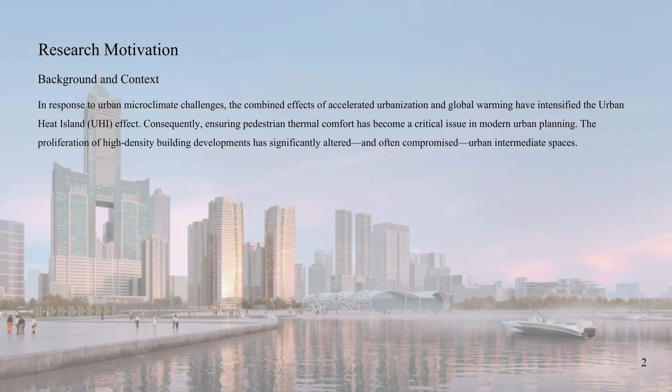To address these challenges, this study investigates the application of urban elevated corridors as a vital intermediary system for future open space in Kaohsiung.

There are three core values: ecological linkage, functioning as an extension of urban green infrastructure. It forms vertical ecological transition nodes and elevated thermal streets at ground level.

Pedestrian integration: by integrating ground level pedestrian circulation with elevated walkway networks, it creates a more efficient and safer walking system. Social catalyst: it also acts as a social medium that enhances urban connectivity, promotes public interaction and leisure experiences,

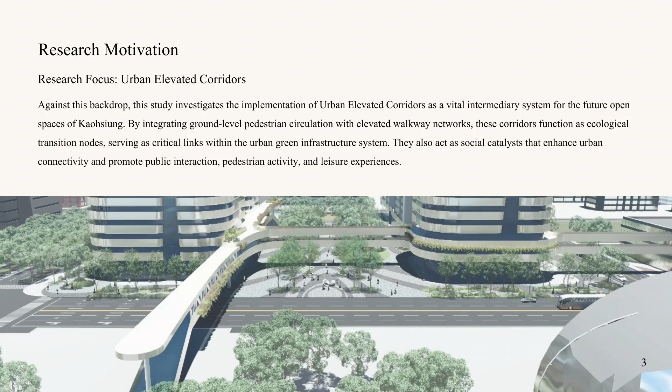and revitalizes urban activity layers. Research question and analytical framework.

Improvement of thermal comfort under urban heat island conditions: can an urban elevated corridor effectively improve pedestrians' outdoor thermal comfort?

Influence of design variables: what is the impact of corridor width, height, materials, and vegetation configuration on thermal comfort? Indices: PET and PMV.

Sustainable urban development goals: how can data-driven insights be used to implement urban cooling strategy and achieve microclimate regulation and sustainability goals?

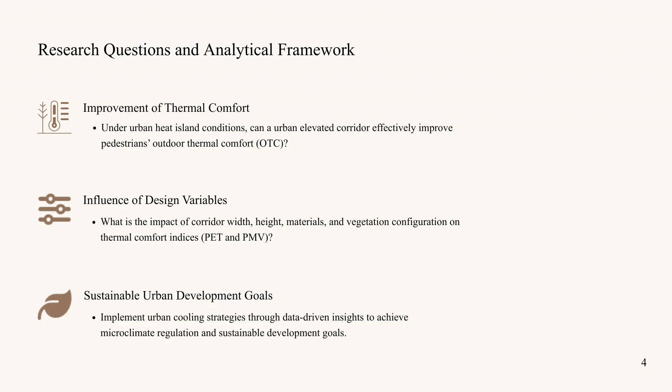Next, through the literature review, I will introduce the key indicators and terms in this thesis. First, PET is a key index used to evaluate human thermal perception under different environmental conditions.

Unlike a single air temperature value, PET comprehensively considers multiple factors, including air temperature, humidity, wind speed, and solar radiation. This index can quickly assess the effect of shading and ventilation on human thermal comfort, and it corresponds to a scale adapted to Taiwan's climate.

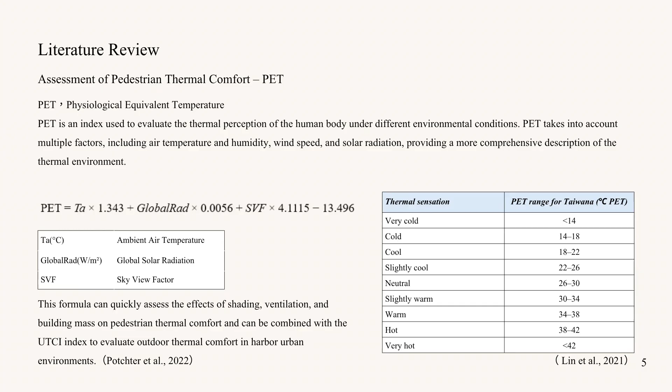For example, when PET is between 26 and 30 degrees Celsius, people generally feel thermally neutral and comfortable. This relates to the assessment of pedestrian thermal comfort.

Next are the PMV and PPD indices. PMV represents the average thermal sensation based on the body's overall thermal balance, influenced by activity, clothing, and environmental parameters. Meanwhile, PPD predicts the percentage of people likely to feel too hot or too cold, and thus dissatisfied in a given environment.

As shown in the curve, a PMV value closer to 0 corresponds to lower PPD, meaning higher thermal comfort. In design practice, our goal is to keep PPD below 10% to comply with the international ISO 7730 standard for thermal comfort.

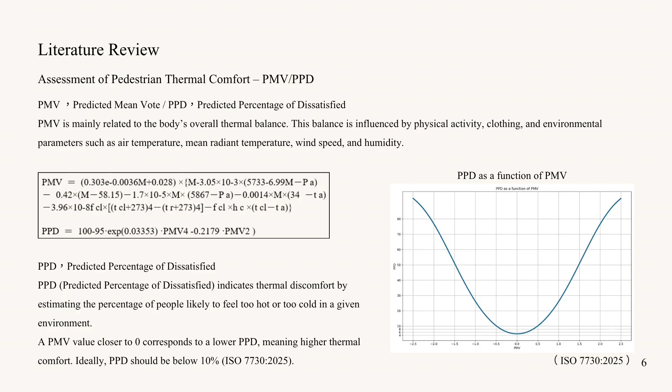Analysis of urban spatial form and local climate zones. At the urban scale, building massing and street configuration strongly affect the microclimate.

Here we adopt Stewart's LCZ framework, which classifies urban areas into 17 standard categories based on building height, density, and land cover. This system helps us analyze the complex mixed urban forms in Harbor City, where port facility, commercial areas, and public space overlap, providing a foundation classification for subsequent thermal environment simulations.

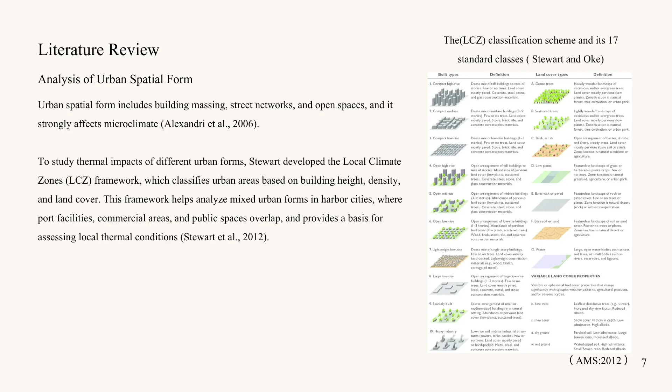About leaf area index and leaf area density: finally, regarding vegetation modeling, we distinguish between LAI and LAD. LAI is defined as total one-sided leaf area per unit ground surface area, while LAD reflects the spatial distribution density of leaf in three-dimensional space per unit volume.

Since microclimate simulation tools such as ENVI-met primarily use LAD rather than LAI for vegetation modeling, we convert parameters using this integral relationship to ensure accuracy in vegetation representation within microclimate simulations.

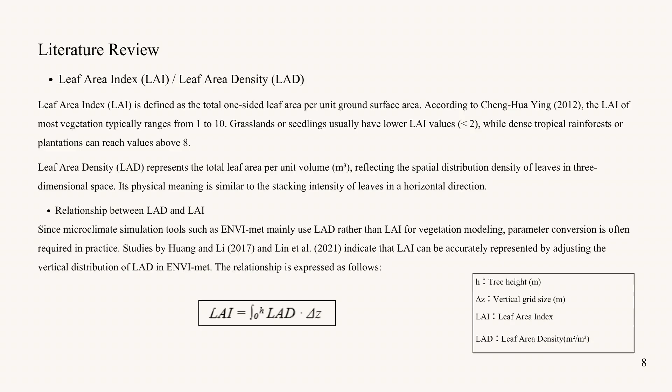The workflow of this study begins with clarifying the master plan, followed by the core phase of ENVI-met modeling. In this phase, we simultaneously conduct three tasks: environmental parameter setting, seed model, and defining thermal comfort indices mentioned in the literature.

After completing the base model, we conduct detailed corridor modeling and perform comparative analysis of three design variables: width-to-height dimensions, material properties, and vegetation scenarios.

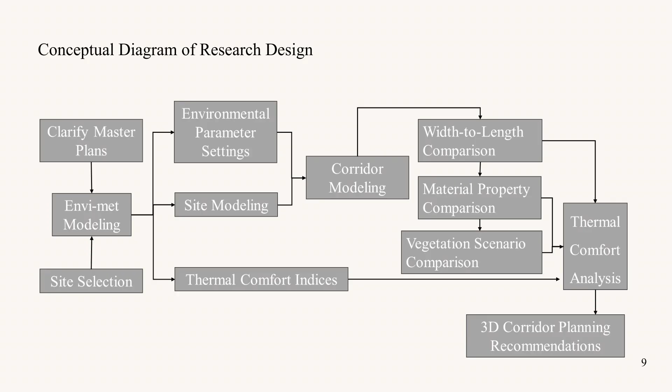Finally, combining these comparative data with thermal comfort results, we derive final 3D corridor planning recommendations as a reference for urban microclimate optimization. Site description: urban development in Asia New Bay Area along Kaohsiung Harbor.

This study selects the Asia New Bay Area along the Kaohsiung Harbor waterfront as a research site, with large-scale harbor development projects planned over the next decade and the rapid growth of urban building complexes. Intermediate urban space has become increasingly important.

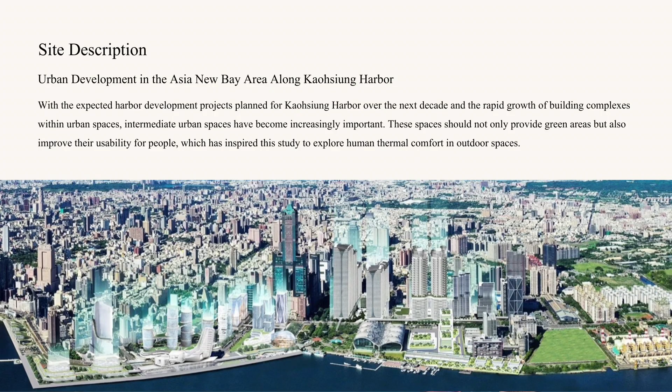This space should not only provide green areas, but also improve usability for people, which motivates this study to explore outdoor thermal comfort and optimize the future interface between the harbor and city of Kaohsiung. Master Plan Zonal Framework.

This plan divides the site into 3 main functional zones based on distance from the shoreline, creating a vertically layered urban skyline. First is the front zone, an 85-meter setback area known as the Waterfront Promenade. As the selected study area, it includes plazas, an inclusive park, and recreational facilities, serving as the main interface between citizens

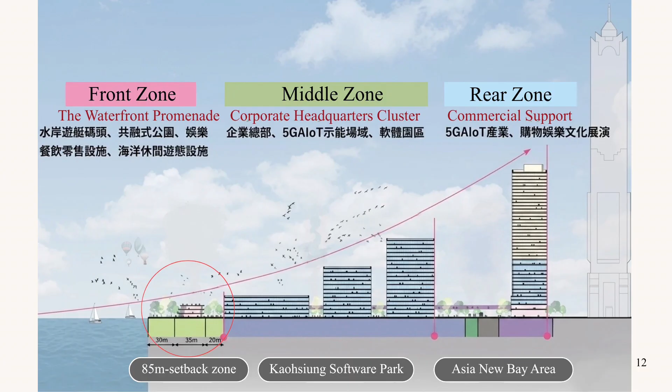and harbor. Next is the middle zone, centered on the Kaohsiung Software Park, forming a high-value industrial cluster. Finally, the rear zone, located inland, provides commercial, entertainment, and cultural exhibition functions. Together, this gradient of building heights from waterfront to inland preserves harbor openness and creates a complete urban chain linking leisure, industry, and commerce.

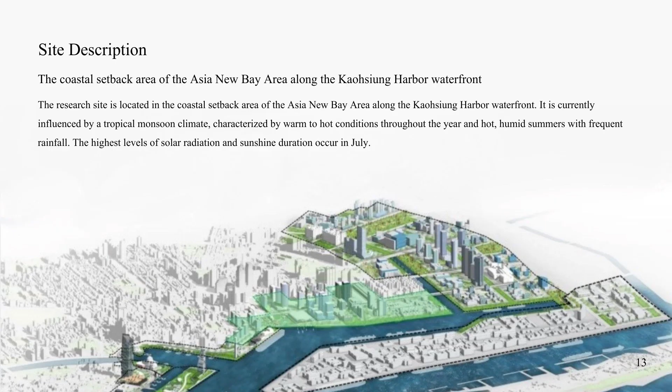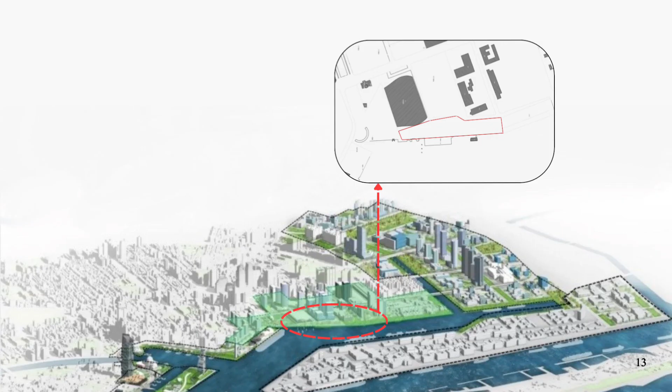Site and climate analysis. This site is located in the coastal setback area of the Asia New Bay Area, along Kaohsiung Harbor. Influenced by the tropical monsoon climate, the area remains warm throughout the year, with peak solar radiation occurring in July. Sea breezes are a key climate factor, helping improve air circulation and regulate temperature and humidity.

However, the site also experiences strong western solar exposure. Its open and unshaded environment leads to significant heat accumulation on ground surfaces and building facades during the afternoon. Therefore, balancing sea breeze utilization with effective shading strategy is the key issue in elevated corridor planning.

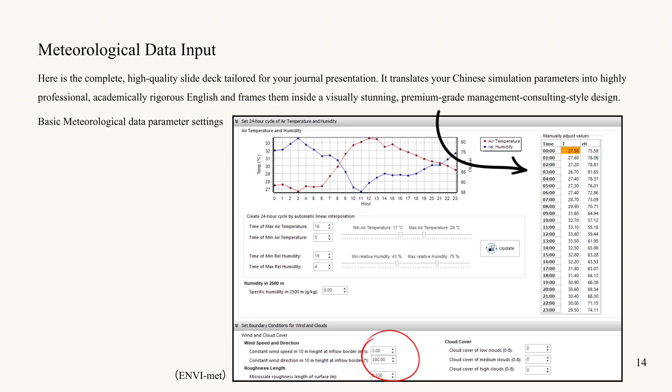This study incorporates detailed meteorological baseline parameters into ENVI-met. This included 24-hour air temperature and relative humidity variation profiles to simulate the environmental condition during the hottest summer period. In addition, for the wind field boundary conditions, a constant wind speed of 3.0 meters per second and a wind direction of 280 degrees were specified.

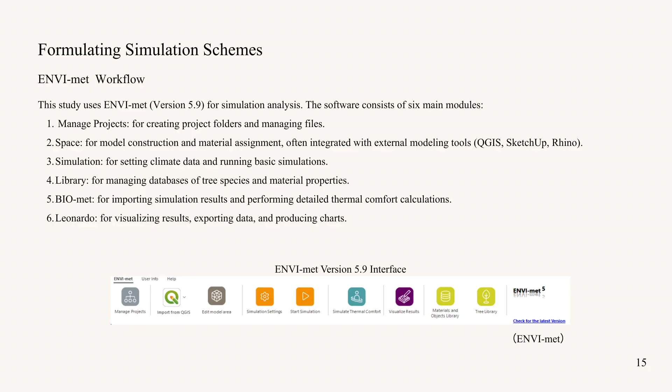This study utilizes ENVI-met version 5.9 for simulation analysis, and the workflow consists of 6 core modules. First, Manage Projects and Space are used for project management and model construction, integrating external models from SketchUp or Rhino. Next, in Simulation, meteorological parameters are configured, while Database manages vegetation and material databases. Finally, BIO-met performs human thermal comfort calculations, and Leonardo visualizes the results, producing hotspot analysis maps.

Baseline material configuration for model construction. In ENVI-met simulation settings, material properties are categorized into building materials and soil substrate. For architectural volumes, particularly the exhibition hall and surrounding buildings, materials such as clear float glass, aluminum, and concrete walls are used. Ground surfaces include loamy soil, asphalt road, granite pavement, and deep water. These parameters establish the baseline for thermal analysis.

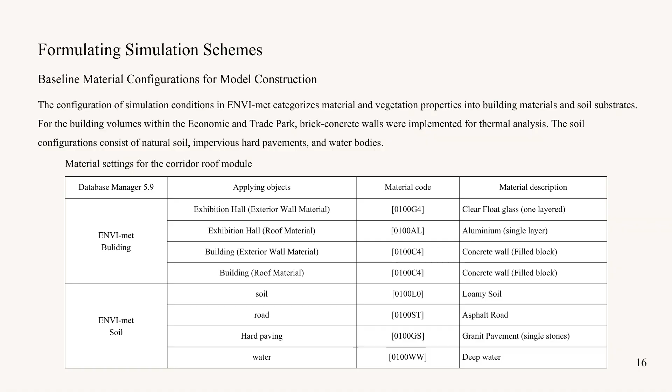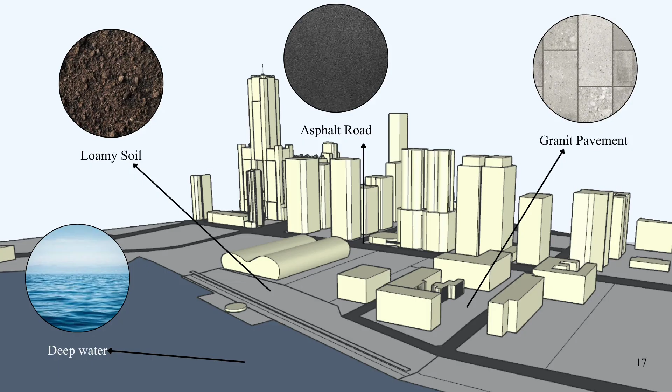From the spatial model, the application of materials is illustrated. For spatial structures in the Asia New Bay Area, such as the exhibition hall, while standard buildings adopt concrete wall construction. Ground surfaces include asphalt roads, pedestrian areas with granite pavement, and adjacent deep water zones.

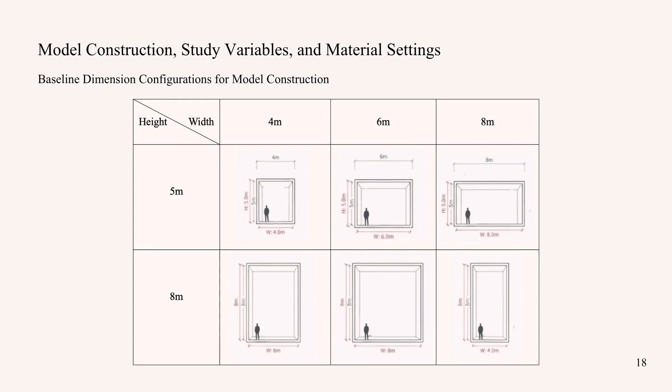Baseline dimension configuration for corridor cross-section. Different corridor cross-sections are established as experimental variables. Heights are set at 5 meters and 8 meters, while widths include 4 meters, 6 meters, and 8 meters. Through comparison of these 6 geometric configurations, we quantitatively analyze the impact of aspect ratio on shading performance and identify optimal dimensions for improving pedestrian thermal comfort under strong solar radiation in Kaohsiung.

Material configurations for the corridor roof module. For the corridor roof system, 4 representative materials are selected: PVC sun sail for lightweight shading, clear float glass, a wet roof system for ecological regulation, and a wet roof combined with a green roof system using sandy loam substrate.

These materials differ in thermal conductivity and radiation transmission, combined with corridor width variables. They enable analysis of the synergistic effect of material performance and spatial form on microclimate regulation.

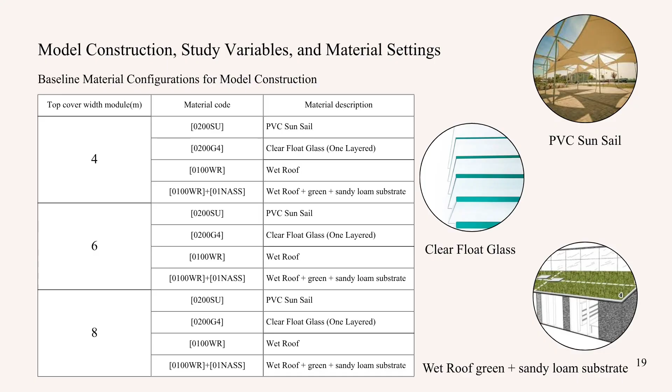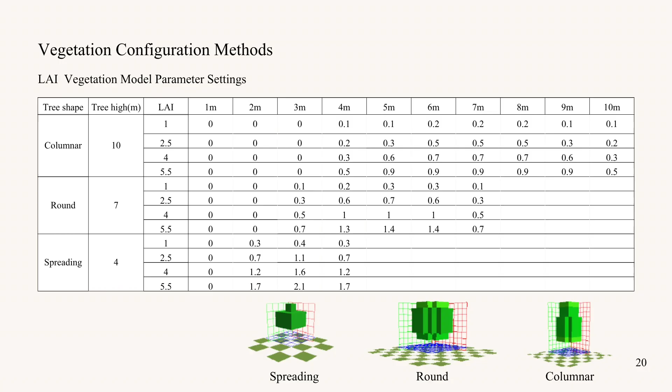Vegetation model parameter settings. 3 tree forms are selected: columnar, round, and spreading. For each type, different LAI values are assigned and LAD values are defined according to vertical distribution. This parameterization simulates shading effects under different canopy densities, providing realistic vegetation input for environmental analysis.

Cooling mechanism analysis. This study explored cooling mechanisms from three perspectives. First, wind effect. The corridor is not aligned with prevailing northwesterly winds. Oblique wind penetration through structural gaps helps remove heat from the human body's surface to reduce perceived temperature. Second, shading. Wider green roof canopies block more solar radiation, reducing mean radiant temperature at pedestrian level and lowering PET.

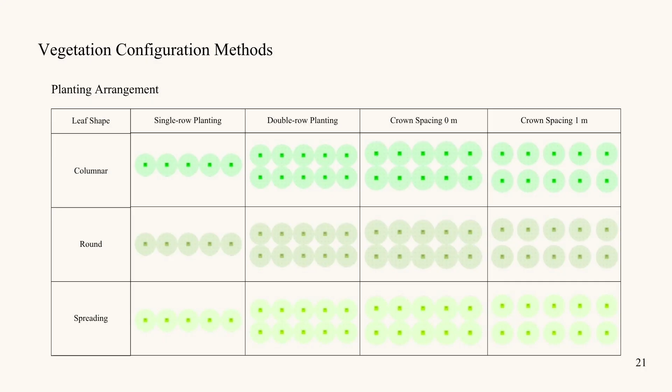Third, vegetation regulation. High LAI vegetation improves visual comfort, and may reduce PET by approximately 1 to 2 degrees Celsius during midday peaks, collectively optimizing the thermal environment.